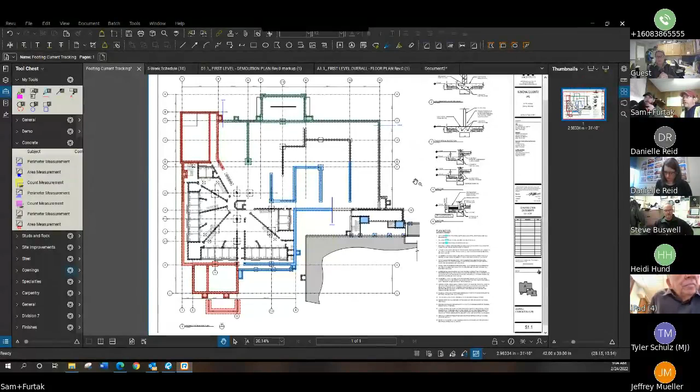Okay, so we got the foundation map up here. Everything that's colored, we have placed the footings and foundation walls. The blue area you see down here, we poured that all this week, and we currently have that under wraps right now, heating. We'll be looking at stripping that either tomorrow or on Monday. But as you can see, we're starting to get towards the end of the foundations portion of this project.

And then the masons have started to mobilize on site, and they are starting to lay up a couple courses of CMU along the west wall line and the north wall line there to get up to grade up to 100, so that way we can continue with the waterproofing and then backfilling around the exterior portions there.

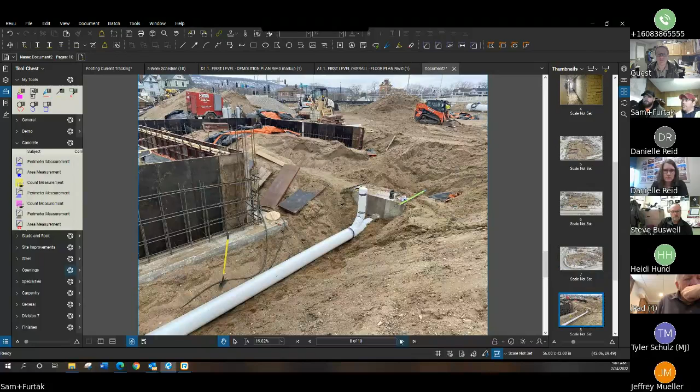Yeah, get to that. There's some of the deeper plumbing that we're putting in now to help save time later on in the project. Some of these were fairly deep, so we're getting that installed. Here's the tunnel cut apart, and then we'll be tying back onto that here hopefully the next week or so.

That is the elevator footing that is being placed there. That one you can see all the ground thaws we got on there to keep the soils up to temperature, and a lot of blankets.

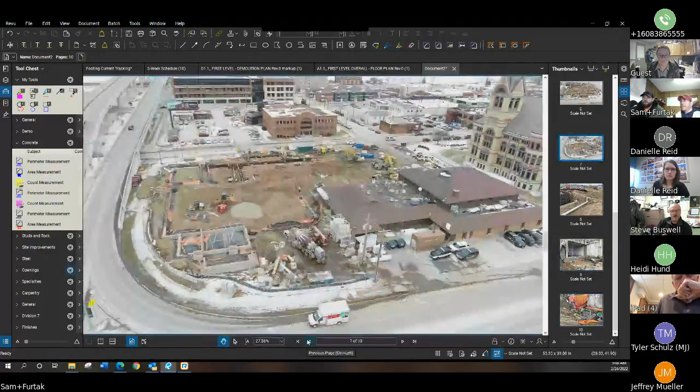Which is pretty important, right? So all along, as I was talking with Danielle this morning, the importance of really the position where Market and Johnson's at right now was that we had to wait, unfortunately, 3 months from the Department of Labor and Industry to get our permits to even start to build.

And then once we actually got those permits, we were already at the point of a hard freeze. The typical frost, if I recall correctly, Josh, was 3.5 feet at that time. So to try to do the soil corrections that we were required from the state through that Brownfield study, to rip up that soil and change it was very difficult.

So on top of it, to be able to pull the stuff out, anything that could be reused or anything that was going to be used as a spot for a foundation had to remain at a consistency that wouldn't allow it to freeze. So all that threw into the mess of a very confined, small construction spot to be able to move equipment around, change the soils, and try to build the foundations, which for a while I thought was going to be an improbability. Somehow they figured this little maze out, and they kept this thing going all the way along it.

And that's why I told Danielle this morning, I am really surprised and impressed on how they kept this project going through all this. Yeah, there's a lot of behind the scenes, a lot of coordinating that has to happen from everybody involved on it that makes the whole thing keep moving.

Good morning. Can anybody hear me? This is Commissioner Ward with... Can't hear. Somehow you dropped off, you're cutting out. Yeah, it's still not coming through. If it's at all possible, Commissioner Ward, you could send something to the chat and we could reiterate what you need about the chat.

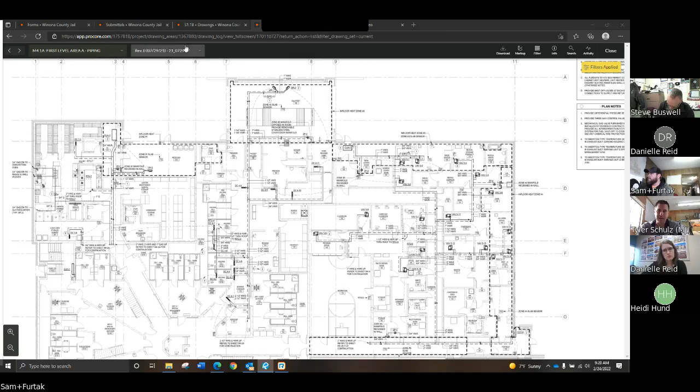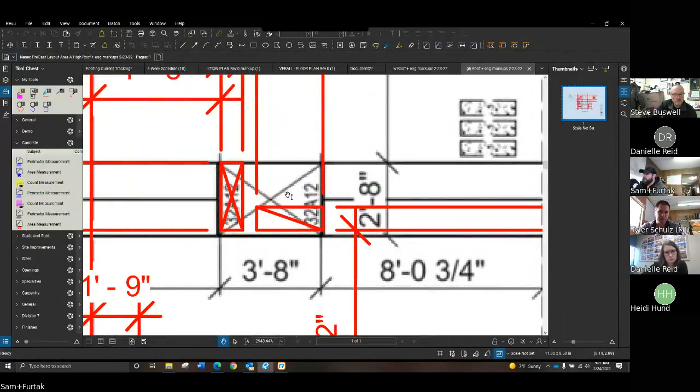Well, some of them we can't oversize. Some of them they have it. There's a couple that have like two openings right next to each other. They want to do one large opening. Like we brought up, every penetration's got to have... here's a perfect example. The red is what we're showing for duct openings for return and supply, but they want to do that big black square as one large opening.

Like we told them, though, through DOC we have to have detention bars through all these openings through the roofs and everything. We were going to call Chris and ask him what options do we have, or what can we do if there's a large opening like that. Can we infill with some steel and bars, or do we have to concrete and fill it, or what are some options if Moline can't make those two small openings work and they have to go with a larger opening? So that's kind of the case there.

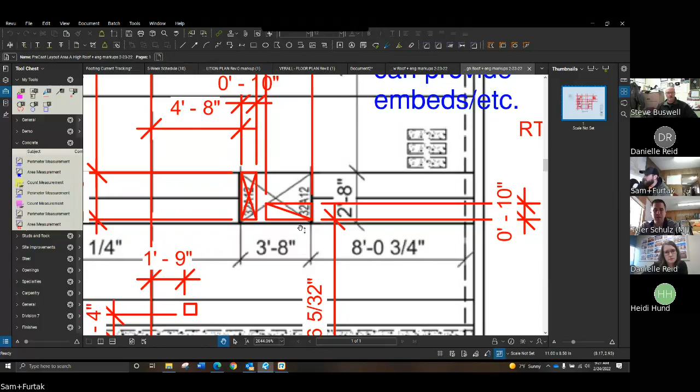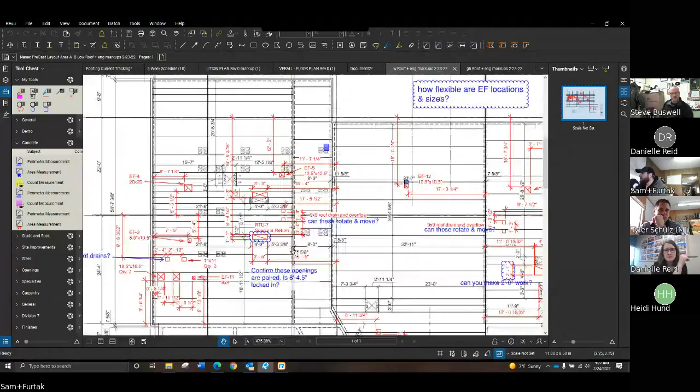I think on some of the other ones, they'll do some more background and research on their design side to see if they can do something with it, and then that'll come back to Troy to review. And maybe it's worth having Troy in the conversation from the get-go, because he might have some ideas too on how to fill in, like on that one where we've got that corner, do we have to add some steel and decking or something?

Because for this one right here, this 1'3", I know they had talked about that having to be increased to 1'8" in order for their plank to work. But by doing that, they can't increase the ductwork. So if you were to do a sleeve through there, you would have 2.5 inches gap on each side. So we'd have to fill that in with flowable fill, or I guess that's what the solution is.

Well, or is it simply in that case just an additional steel angle that closes it off or something? Yeah, that's kind of what we said too, but we weren't sure what Chris would accept.

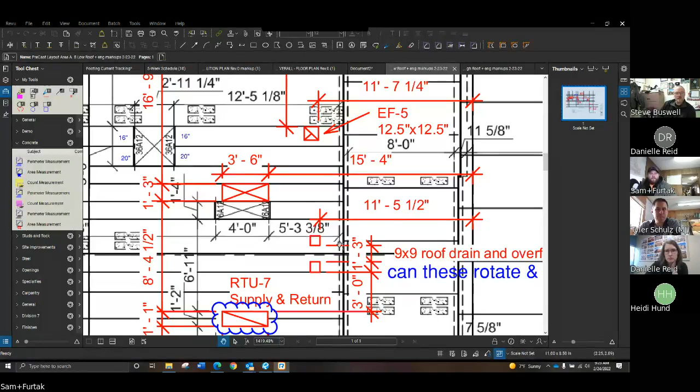So I guess, Sam, you probably haven't had a chance to hit Chris up yet, had you? No, I just got this from John, so I was gonna put together a few things, and then me and Steve are gonna call him. We're gonna call him, and that was one of the things that we discussed too, was like putting in steel.

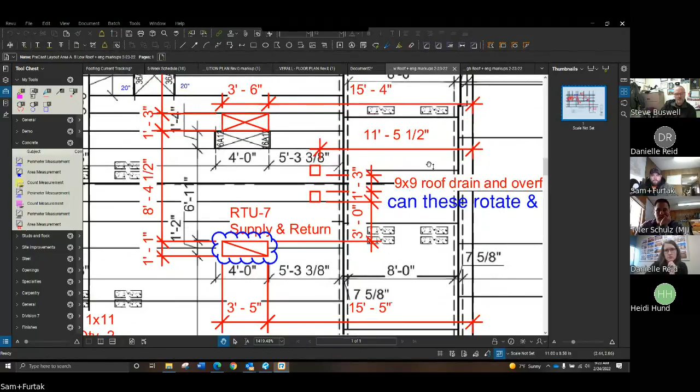My biggest concern, prior to calling Chris, when he was down here, we were talking about gridding and making sure that all the security was on that secured envelope in place. Nothing was greater than that 5 inches on center and stuff. Even though we're having like this small gap around it, how is it going to be secured? So no matter what's even inside of the ductwork, if the ductwork's not solid around something, any kind of gridding and stuff can just get yanked out. What's going to hold all that stuff in place?

I think the whole thing has to be looked at in terms of whatever gap is around where the vent comes in and out, and how that's secured, as if it were a continuation of the planking. However we bolt it on, put concrete decking over it and pour it later, I think that's fine and should be approved, but I want to make sure we're all on the same page. Ripping open the bigger hole isn't a big deal, it's really about making sure it's secured as if the planking stayed there.

It's not unlike the skylight openings where we've got the detention enclosures detailed. The detention enclosure is more like a gate, so how that's secured is with steel angles, which don't necessarily need to be continuous, but those angles themselves have to be secured to the plank. It's the same concept, just it won't be operable — it'll be a fixed duct bar.

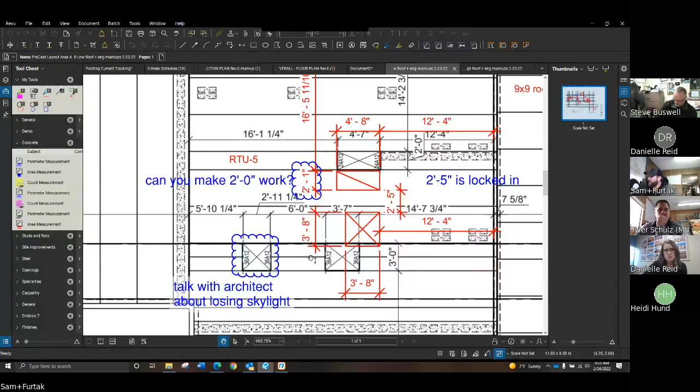Here's another major issue they were having in this area — the corridor area for programs. The way this was laid out, the HVAC couldn't move their ductwork because there was a wall running through there, and these units come prefab all together, so moving one would conflict with the wall below it. With the skylight not positioned the way it's shown here, along with this ductwork, they weren't able to provide both openings because they'd need a certain support — I can't remember what it's called, Tyler — but either way, you need a solid plank on each side of this opening to carry that weight.

It sounded like that skylight would have to slide to be in line with that opening, if that's at all possible. They had issues when you stagger an opening — if a plank, like the red X'd one, is the opening, and there's another opening on the plank next to it, that's when issues come up. It's better if they run in the same plank line, because then they have two solid plank sections to support it.

So that skylight was in question — is there any possibility, or what are our options with that location? When I looked at it this morning, realistically we were just moving it from the center of that day area, the small day area around the classrooms. That's the skylight actually right by the computer room, to the north.

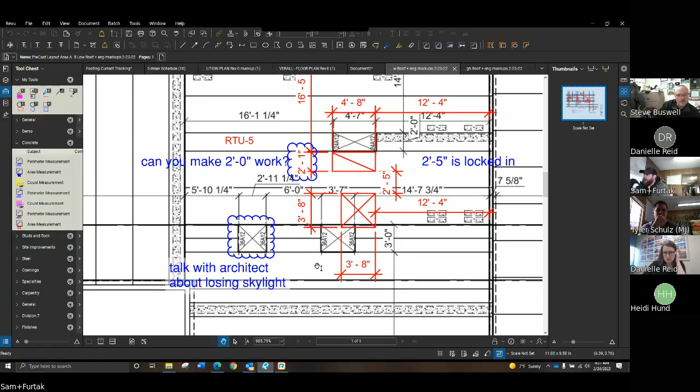Right there, that's the gym program area. There's no magic to that one — it was just an added-in skylight, just like in the staff break room and the booking room, providing natural light for staff and inmates. If that got shifted to the north, it might not be the prime spot, but I don't think you're changing anything really.

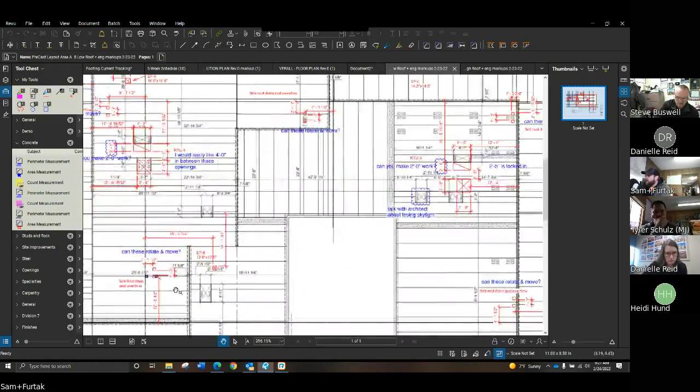I'm with you. And then one other area of concern was all these roof drains — that's what all these are. When they're configured like that, the precast wants to see them flipped, so they're running parallel with the plank line instead of perpendicular.

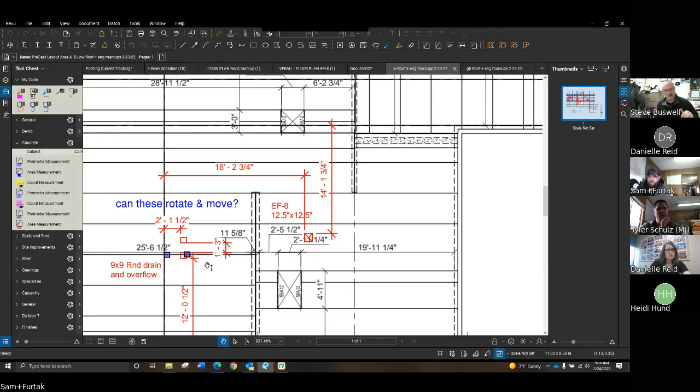I didn't get this answered — does it have any effect on where it comes through, like whether it's going to be over an inmate-occupied spot, or screw up a storage room, or be in the way of a plumbing chase or anything like that? Well, they do have some play on where they could move them. Talking to the roofing contractor, we'd have to get them reapproved, but he said they have a couple feet of play that won't affect the drainage, so they can move them to miss walls below or rooms.

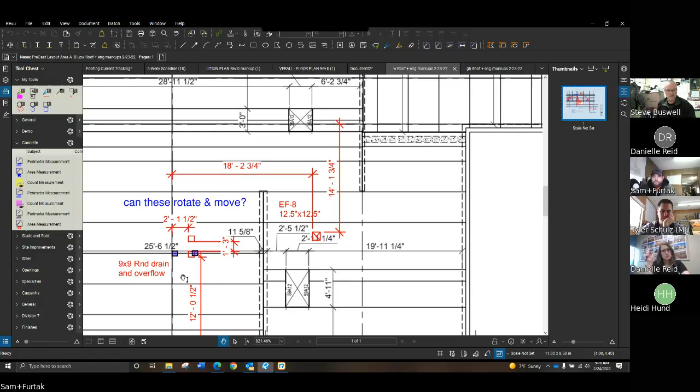I don't see any issue. As long as the roofer and the plumber are okay with it, I'm okay, because all those spaces were where the piping was concealed anyway.

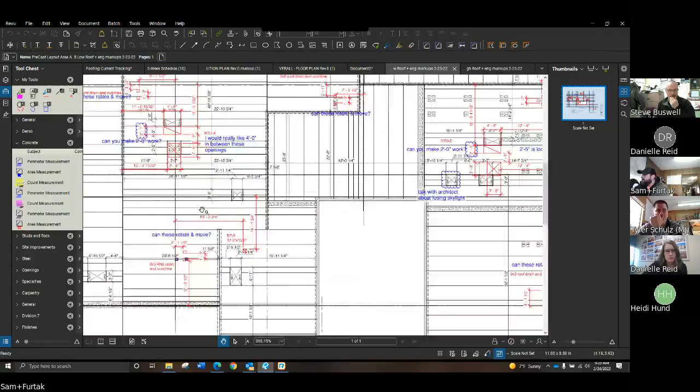All right, we'll talk to Chris, and then might have to get a better workup if they have any more concerns, and then have a quick meeting on that. But first we just got to confirm that those openings can be made larger and then filled back in. I think likely what he'll say is, yeah, absolutely, they can be filled back in, but I'd like to see the detail for it and make certain it's secure and actually closed up.

What's creating the security before you even put that concrete decking on top of it? Because if you're just pouring concrete next to the precast or whatever, what's securing it to that precast? If there's a piece of angle iron in there, is there a 5-inch gap or more - that's what he's going to be concerned about. But on top of the structural, obviously we want the roof to be solid. There's a unit sitting on top of it. We don't want it to fall through, at least not while I'm still working here.

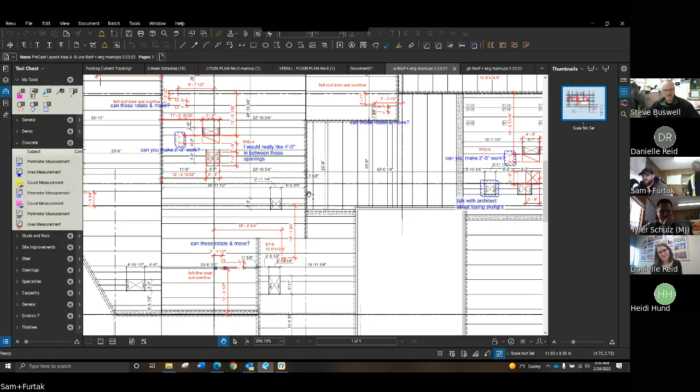Just kidding. Okay, yeah, all right, right.

Danielle, I got one more question that just came up if you've got a second. I'm going through with Mike, my masonry superintendent, and we're looking at flashing elevations around the building. I thought you went through and established them a bit when they did that review to see if we had to drop that foundation wall down any - is that correct? Did you have something you already did on that, as far as identifying it on the exterior elevation? I didn't know if you had something in house from that review, just so we could compare them, or not.

No, I think the detail we revised had a dimension to hold to from grade. And then I know our exterior elevation showed it graphically stepping, but that was the only thing I know we did on the document. Okay.

What I'm seeing on the architectural details is 4 inches minimum from over grade, and my question to you would be, would that apply at the sidewalk locations and pavement locations also? Is that 4 inch minimum up from that as well? Yeah, yep. All right, thank you, Danielle.

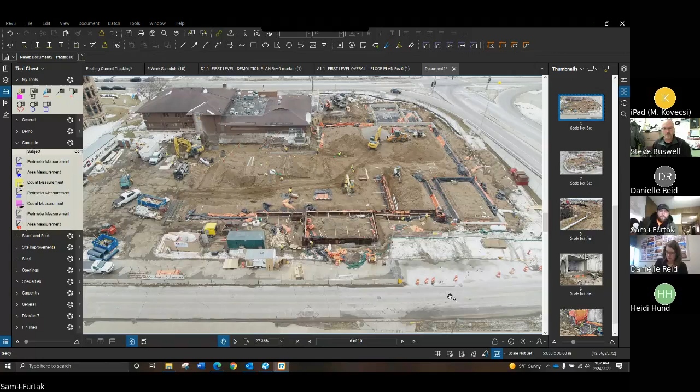And then even more so with the soil correction, the hardest part became that once we got the permit, the ground was already at a frost depth of about 3.3 to 3.5 feet. With that, it became much more difficult. You don't just get an excavator in to move that soil. So they had to go through ground thaw units, break the stuff up, and then work on getting soils back into those areas that were able to get compacted at a rate that would meet the requirements. That meant keeping that ground actually continued to be thawed the entire time.

This is such a tight area that you can see by this picture how this foundation is taking up the lion's share of the land, so it was very difficult to even move things around, let alone start putting in a foundation. Somehow they made this thing work. They kept the process going, maybe not exactly the way they initially planned, but either way they kept switching up and figuring things out day to day to keep this process going.

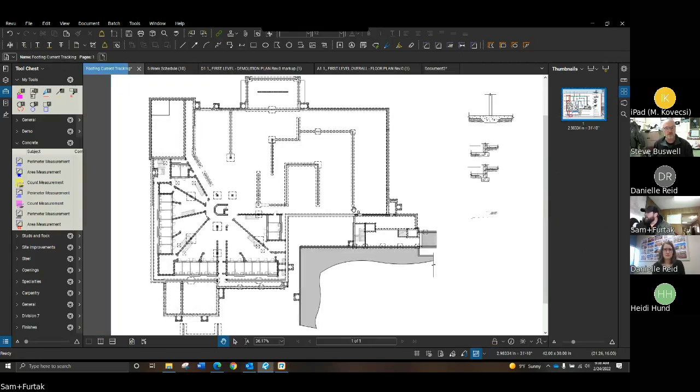So they're probably at about 100% soil correction, that's completed. The foundation's probably, I'm taking a guess because this picture is a little older, so they're probably now right around... this is the update... 85-90%. So everything in color right here, Commissioner, is indicating what's done for the foundation. What's not in color so far. Those are great pictures.

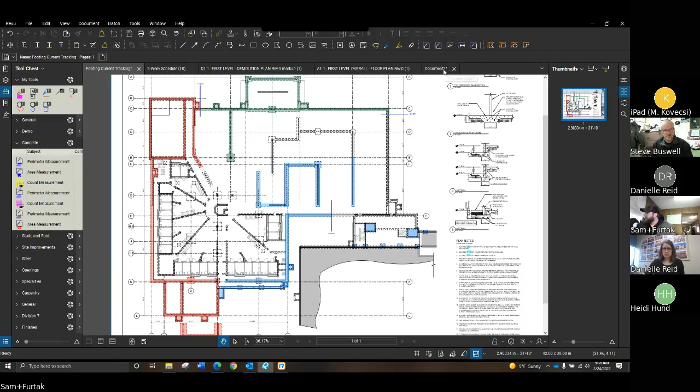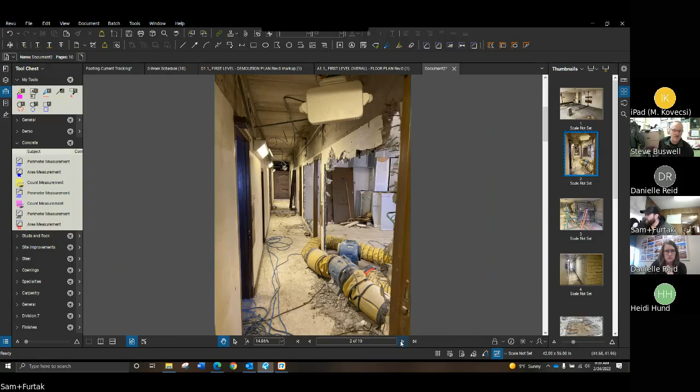Yeah, I can cycle through the rest of them too. I was just letting Steve up there. If you want to start from the beginning, this is the interior demo. So this used to be our moderate cell block, there used to be 6 cells in here, bars in it and everything, and they went in and demoed this stuff. During the time they couldn't work outside because it wasn't advantageous to do it, too cold, they couldn't do any kind of pouring or soil correction, so they changed up their staff and came inside to continue on some of the demolition here. So we're a little bit more advanced on the inside demolition than what was expected, but it had to be done.

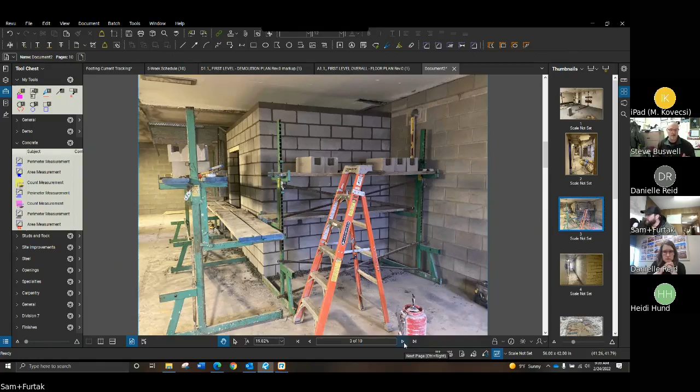And now they're actually back to it. Here's the new CMU wall, the concrete masonry unit wall that's coming back in. The bump out part of it, that's the Sally Port area. That was part of the requirement for the Minnesota Department of Corrections to have that Sally Port for secure detention.

So what you're looking at now is the south hallway corridor for the current jail. If you notice, you're looking all the way up to the ceiling, up to the old planking. Right up above that's the attic. There's no ductwork, lighting, or anything inside that area. All that had to be gutted for this demolition to happen, and then come back in with the concrete masonry units. Inside those concrete blocks is concrete that's been poured into it as well, so that's a completely solid, brand new solid wall for security.

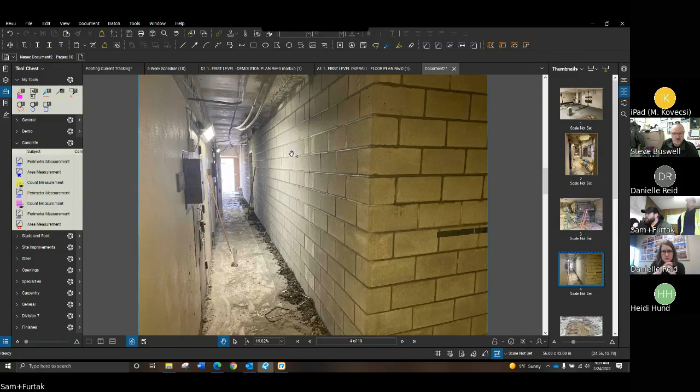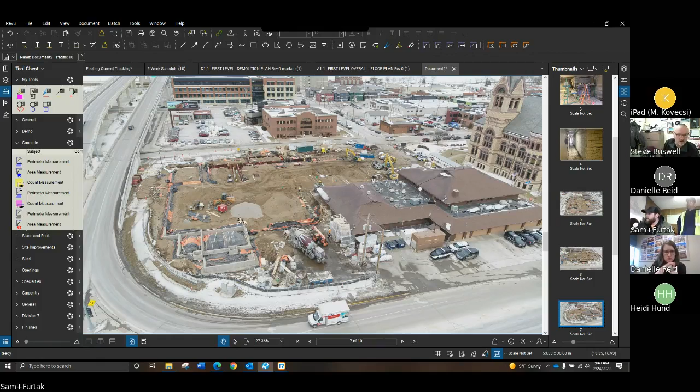So the bottom part of the picture where you see all that concrete, on the southwest corner, that's where the generator is going to be. And then the next two parts of those concrete rooms are going to be where the water boiler HVAC system, where the water comes into the building, and where the HVAC systems are going to be. The rest of it's going to be jail. So you see that big dozer sitting in the middle, that's pretty close to about where the staff station is going to be, and then the 8 units are going to wrap around that.

I don't know if you want to go over where the garage Sally Port is. Where his hand is on the picture on the bottom of it, that's where the garage sally port's going to be. That's going to be where 4 squad cars can fit, plus a fire truck, an ambulance, and a squad car. Off to the right in that corner, that's where the kitchen area is going to be, the kitchen and laundry.

And then basically going back towards the south, that's where the 8 units are from another angle. And then there's an intake area for non-secure right there. That's going to be a spot for staff break room, and behind it there's going to be storage, because we don't have any storage inside of the jail right now. In front of that's going to be a much smaller garage, really just an intake spot to get products dropped off. So whatever the jail needs day to day, whether it's food coming in for the kitchen, or supplies that's been ordered, they're going to get dropped off into that location.

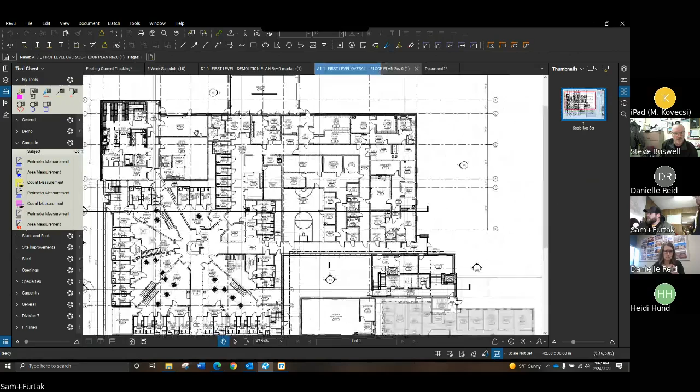Yep, here's giving you another. That's good. Sam's good at this. I wish I was that good switching around on stuff.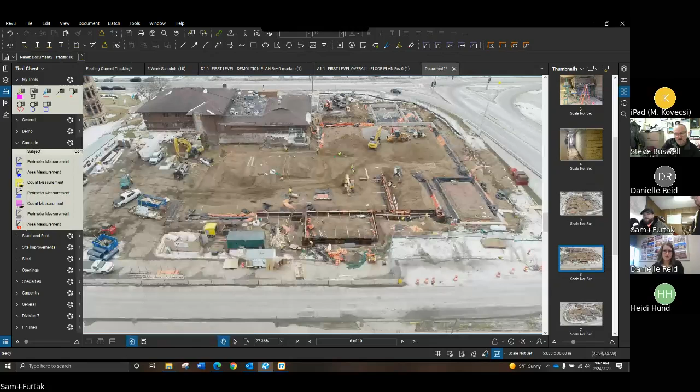But here's giving you the chart to start really seeing what we're looking at, or what you're trying to see from the outside. Right now it's hard to envision. Now that we're moving into March, the best part's going to be what you're seeing, that's the beginning of the foundation. They've already started to build the concrete masonry unit walls up. Once this weather stays good, like it looks like next week, this thing's going to go up much quicker.

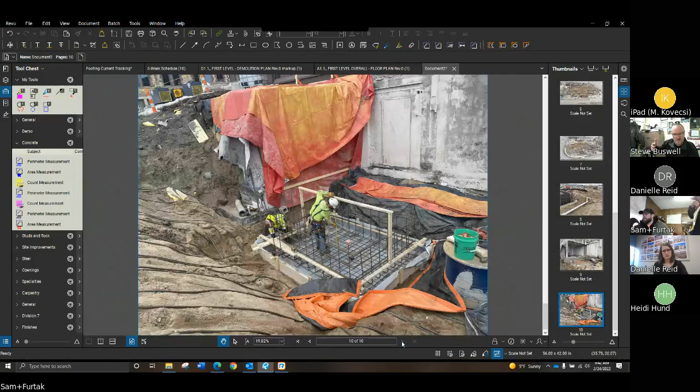So we're trying to hope to get maybe some time back in the scheduling. Right now we looked at in between the substantial completion of the jail plus the transition time of 3 months, we were looking at a possibility of going out to December of next year. We're hoping to bring that back to September. Initially we were looking at a turnover time of March 2023, then we started looking at June, July 2023. So even if that time stays in, August, September, October, we're still looking at the possibility of September, October getting the first inmates in. But these are guesses right now, all depending on the weather, supply chains, and everything else.

But we're sure looking pretty good on the Market and Johnson side and Klein McCarthy side, meeting all the time, getting everything done, slaving things together quite quickly, and turning around to get the product going, get the jail keep going. So it's been pretty impressive. I've been very impressed with how things have been going, thinking that with the weather and when we first started, we were really hitting a big brick wall before we even started digging anything. So it's been a good run so far.

Good. Thank you for running through those. I appreciate that, that does give a good visual. Yep, and we'll cross our fingers on the weather, right?

Absolutely. And then the next thing, if we're going to try to come up with a much better schedule, drilling it down - obviously it's early spring, so it's pretty hard to say for sure this is the date, but I think it's going to be a lot closer rather than month spreads. We're going to be within a certain time frame of being pretty close to it. So as Danielle said, on our next meeting next month, we should have a better recap on really where we're going to be for schedule.